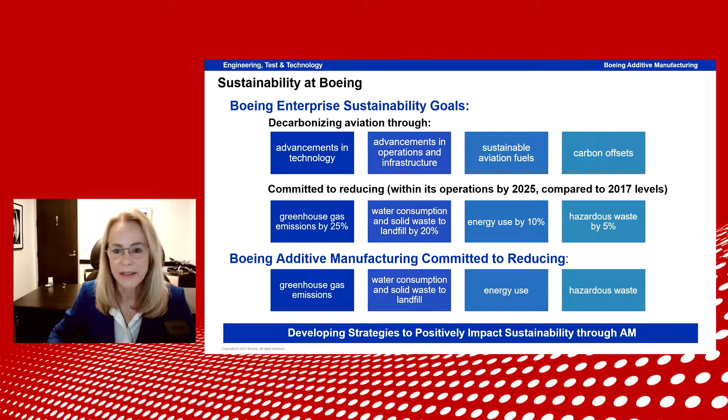One is because of the intrinsic nature of additive, where we use very close to only the material that we need. So if we're just doing a part-for-part swap where we haven't changed the design, we're using a lot less material. But then there's another way as well. We go a step further, and then we can optimize because of additive — we can optimize that part and lightweight it, and even use less material. So we have less waste generation and design optimization. I think we all know that we can lightweight parts.

And integrate assemblies, so we can reduce the actual operations of assembly by integrating parts together. And we eliminate not just the parts, but all of the processes that go with those parts — the procurement of fasteners, the testing of the other parts, the transport of all those parts. We reduce that, and all the energy consumption that is coupled with that. We eliminate primary tooling, and that's the labor, the time, the cost, and the materials and energy.

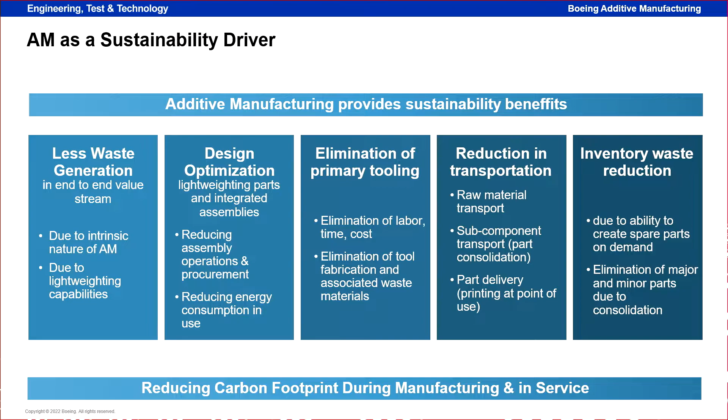Reduction in transportation, that's the raw material transport at the early stage of the value stream—the mining of the material, the converting of that material to a printable material, and the transport of that material—that's greatly reduced. And then all the other reduction in transportation, the subcomponents that we've eliminated.

So when people ask me how many parts are you printing, Melissa, I say you got to flip the question into how many we're eliminating. And when we eliminate all those parts, we eliminate all of the processes, not just the overhead—I should say the energy overhead, with respect to quality, procurement, testing, transportation, and let alone the energy in creating those parts and materials.

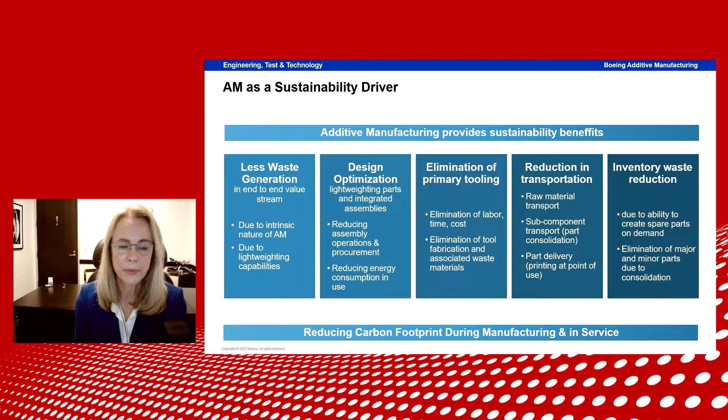And then the last part, inventory waste reduction. Due to the ability to create spare parts on demand, we're not inventorying large amounts, and as I said before, the elimination of major and minor parts due to consolidation—those parts don't exist anymore, so we're not inventorying them.

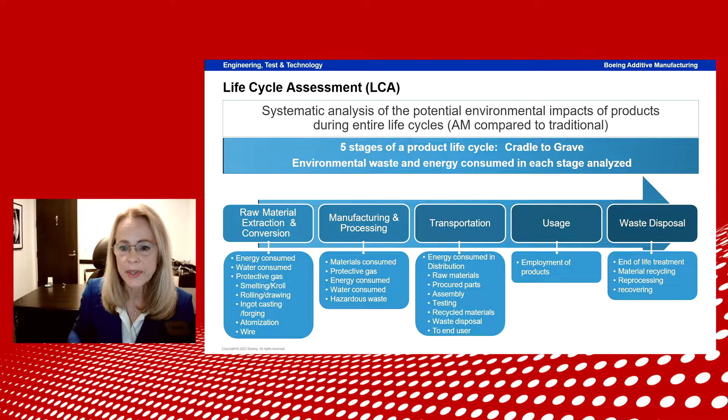The usage and the waste disposal—end of life, material recycling, reprocessing, and recovering. So these are the attributes that we looked at for our case study.

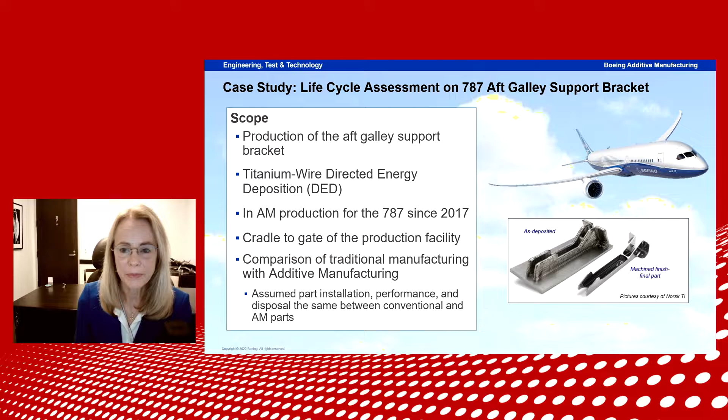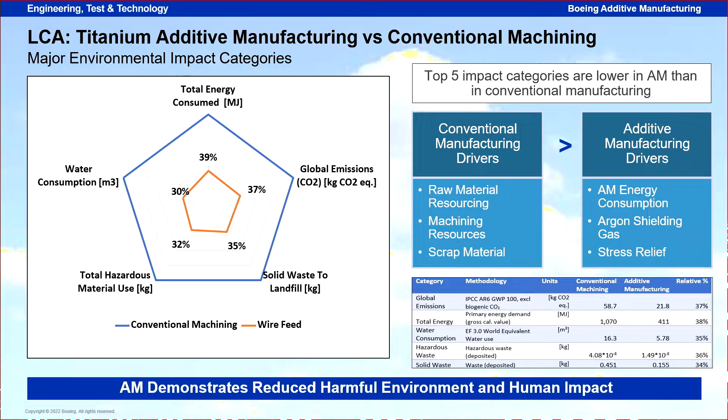And this is what we find. Excuse me—so we have, there we go, the titanium additive manufacturing versus conventional. So we have the five key metrics that we've aligned to our Boeing goals: energy consumed, global emissions, solid waste to landfill, hazardous material use, and water consumption. And the blue in that pentagon shape is the traditional case.

The orange is what we measure in our additively manufactured case. So you can see in every single attribute, we're significantly lower. So we've really reduced the harmful environment and human impact. And on the right-hand side is me trying to tell you why.

It's really for this particular part, the raw material resourcing was the major driver, and then the machining resources and that scrap. And even though the additive manufacturing process has pretty high energy consumption, and we had to use argon gas shielding, and we had to stress relieve things we didn't have to do otherwise, that was still accumulatively much less than the conventional manufacturing drivers.

I'll interject here that this won't be the case for every modality, every part. The particular case that we've decided to study first has this really great attribute.

And one of the things that we're doing now at Boeing, we're doing a case study for powder bed fusion and a manifold that's typically cast, and then another powder bed fusion for like a sheet—what's typically a sheet metal bracket. And giving away the punchline in advance, we'll find that the sheet metal bracket is going to have a really bad sustainability impact, and it's best to just produce that part traditionally, which was just something that we really wanted to know.

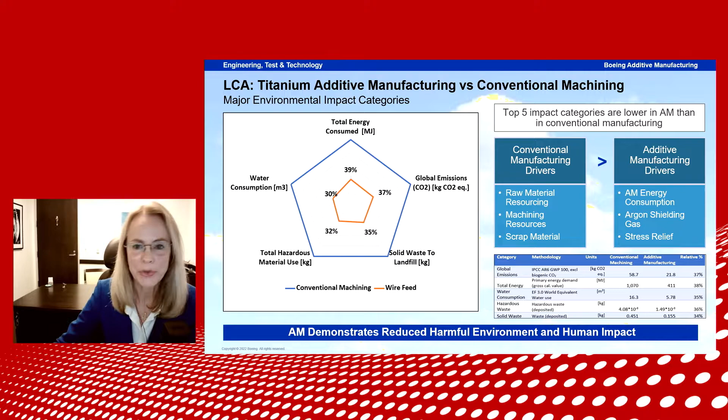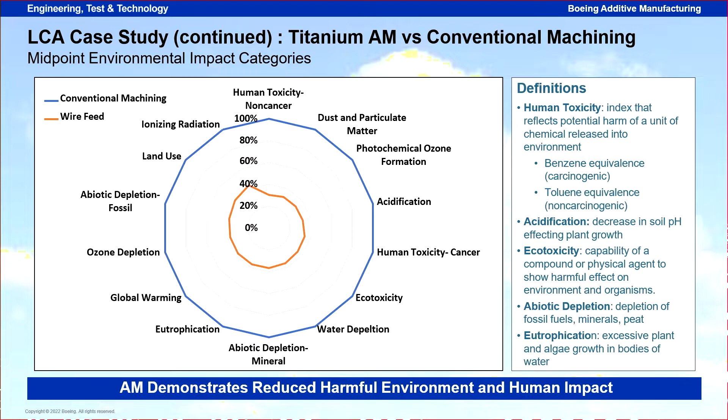Going back to the presentation, we looked at other drivers. Some call them secondary, but I think they're really important too: human toxicity, both carcinogenic and non-carcinogenic, acidification, ecotoxicity, abiotic depletion, and eutrophication. I have definitions on the side if you're not familiar with these. You can see the additively manufactured part is always significantly lower, so it's really reducing the harmful impact on the environment and to humans.

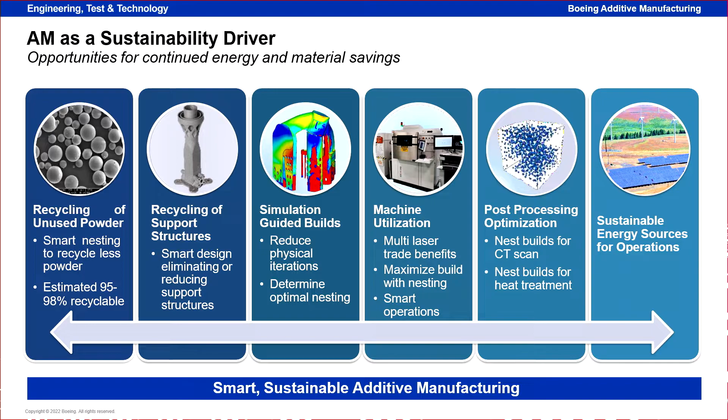There are a few other things we can continue to do: being mindful of how we recycle our powder, being smart in how we nest things. The little part I'm showing in the second column is an AMOS command horn antenna launched on a satellite in 2019. It's a redesign from a traditional part which had many fasteners. It was designed as a monolithic part, and I really like this part because it was designed not needing a single support structure. We've got to get smarter with respect to support structures and designing for no support structures. I think many times that's possible.

Also, simulation-guided builds make sure we get it right the first time—this is part of our value stream. Machine utilization, we're doing some studies. It looks like multi-laser machines use a lot of energy but go faster, so many times it's beneficial to use those. We'll actually use less energy holistically. Post-processing optimization and nesting, CT scans and heat treatment, and finally sustainable energy sources for operations. So this and other things, we're always looking at how we can be even better.

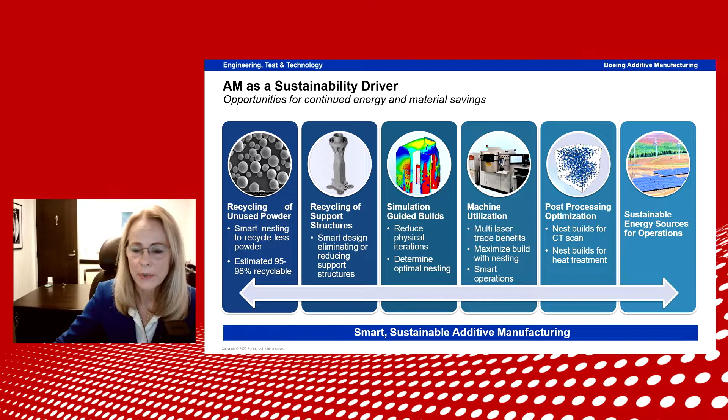I'd like to close with a quote. I think it's really important. I like this one: 'A society grows great when old men and women plant trees in whose shade they know they shall never sit.' I think this is really important because it points out that we don't do this right now for ourselves—we do this for future generations, to make sure their world is a better place. So I will end there.

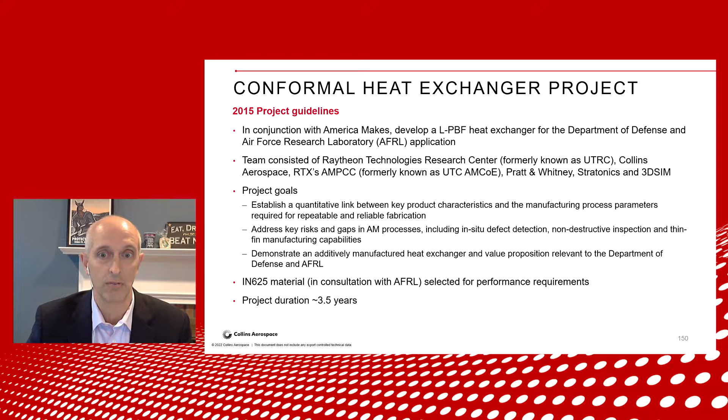We were working with Inconel 625, which is certainly a material all of us know quite well, especially in the aerospace industry. This project duration was quite long, about 3.5 years. The project got started in 2015, but we ultimately didn't deliver the final heat exchanger until sometime in 2019. That speaks a little to the persistence, and we'll talk about lessons learned later, but the persistence and focus of operating in an environment like this across a long time.

For the conformal heat exchanger, we took what we thought was a pretty novel approach. At the time, if you remember back to where we all were in our additive journeys back in 2015, some of what we might look at today as pretty normal or standard was fairly cutting edge or groundbreaking. So using some of the predictive tools, not only for process but also for performance of the part, I think at the time was fairly innovative.

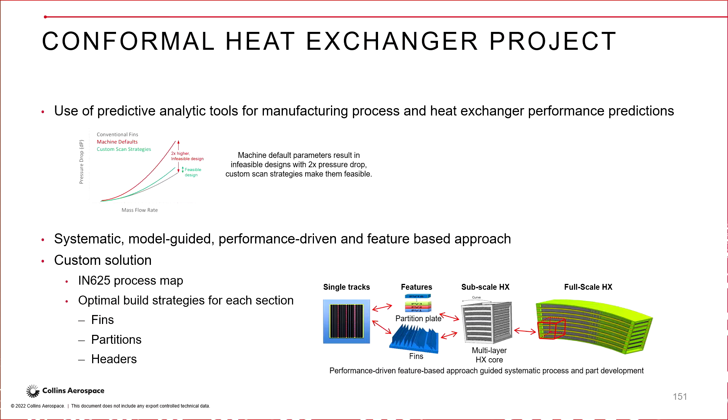What you can see from the graph is really about the machine default parameters. At the time, when some of the machines didn't have the capabilities that the wonderful OEMs are producing today, we really needed to look at customized parameters - how we could work with the machines and all the parameter sets in order to design and produce parts that got down to some of the features we needed. Heat exchangers and their performance depend heavily on surface roughness, a huge aspect of all the subcomponents - the fins, the plates, et cetera. So working with customized parameters was very important to us.

We took a physics-based model approach. We wanted to look at the performance of not only the final assembly, but the individual components. That was very important to us. From there, we developed a customized solution for each section of the heat exchanger. How we attacked the fins was different than how we attacked the partitions, which was different than how we attacked the headers, because each of those parts have different performance characteristics. Each section has different requirements, so a one-size-fits-all approach was not going to optimize the performance of the part.

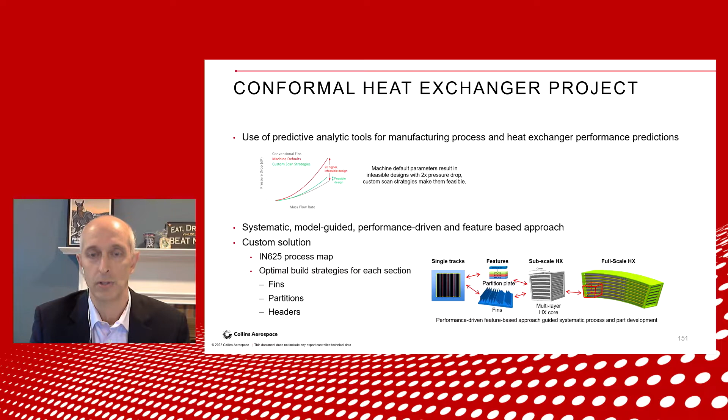So a key learning here was: customize your build, customize your strategies for each section of the part, whether you're building a heat exchanger, a housing, landing gear, whatever you may be building. Look at each individual section and really attack them individually.

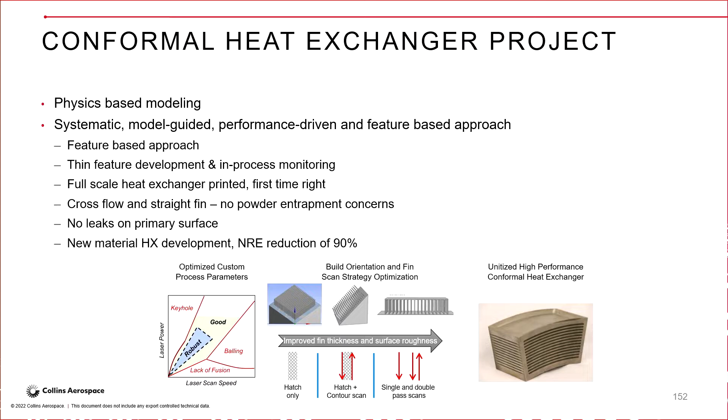I mentioned the physics-based modeling a few moments ago, and we took a look at different approaches for the different components, but also how we looked at the machine-material combination. Building a customized process map, which you can see on the left side, we were able to work with the machines and find our sweet spot, where the combination of laser speed and laser power gave us the best output, the best outcomes inside the build chamber.

With respect to the heat exchanger itself, as has been mentioned a number of times today, we wanted to get it right the first time. Although additive at the time was still fairly new for us, and we were learning, in everything that we did, we wanted to succeed. We'll talk more about success on a subsequent slide, but success doesn't always have to mean hitting your objectives. If you're learning and bettering yourself and your process, even from a quote-unquote opportunity, aka maybe a failure, there's nothing wrong with that. So while we wanted to get everything right the first time, we did not do that - I'll be very honest about that. But as long as we're able to learn and continue to move ourselves forward along our journey, that has to be defined as success, and I'll talk more about that on a subsequent slide.

Some of the performance characteristics, obviously, we talk about no powder entrapment. For a difficult closed geometry like a heat exchanger, powder entrapment is a huge issue, so that was important for us. Leaks on the primary surfaces, obviously we cannot have the fluids interacting, and so that was important.

And then, obviously, looking at some new materials, trying to reduce our NRE. So really trying to, through modeling, through simulation, reduce a lot of our efforts up front. Very, very important metric for us, and we were able to do most of that.

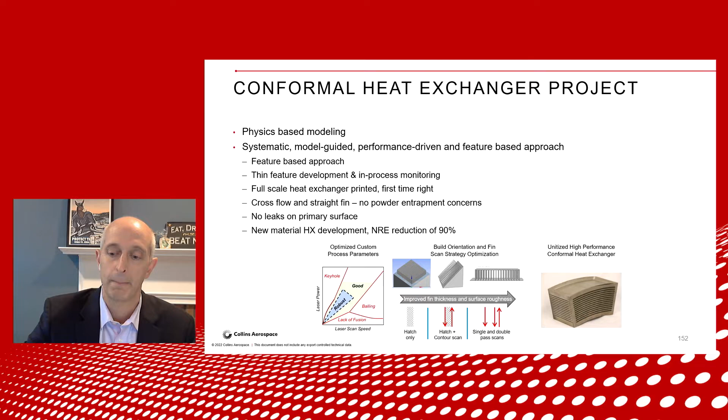So how did the team work? Again, we all understand the physics of additive manufacturing. I'm sure everyone in the room has great experience in that. But for us, one of the key learnings was, how did we break this down? What were the opportunities from an organizational perspective to really improve?

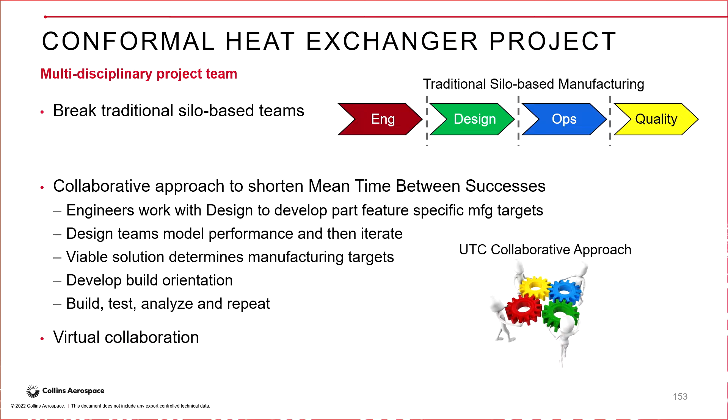If you think about our traditional silo-based manufacturing, engineering hands off to design, hands off to operations, hands off to quality, et cetera, and it goes through the value stream in a very linear fashion. But for us, we knew we needed to break that paradigm. We knew we needed to change the way we did business.

And so we really took a more collaborative approach. The graphic down below shows really all of the different functions, all of the different teams were interacting with each other on a real-time basis. And we kind of got rid of that linear nature of our previous operations.

One of the things we were able to do is what I've sort of coined the phrase mean time between success. We talk about mean time between failure typically, but success can be defined however we want to define it. We defined it as long as we're continuing to learn, even if we don't hit our objectives, as long as we're continuing to mature our processes and better ourselves in the spirit of continuous improvement, that's a success. So reducing that mean time between success, reducing the time between iterations, was very important to us.

And so that last bullet of build, test, analyze, and repeat, we were able to shrink that time significantly from where we started when we first kicked off this project to where we ended. Going through builds much quicker, going through design analysis much quicker, going through simulations much quicker, very, very important.

And then virtual collaboration in today's environment, as I'm sitting thousands of miles away from all of you in Munich, the virtual world has unlocked, obviously, as a result of the pandemic, more than it ever had been previously. But at this time, in the 2015, 2016 timeframe, that was a new approach for us.

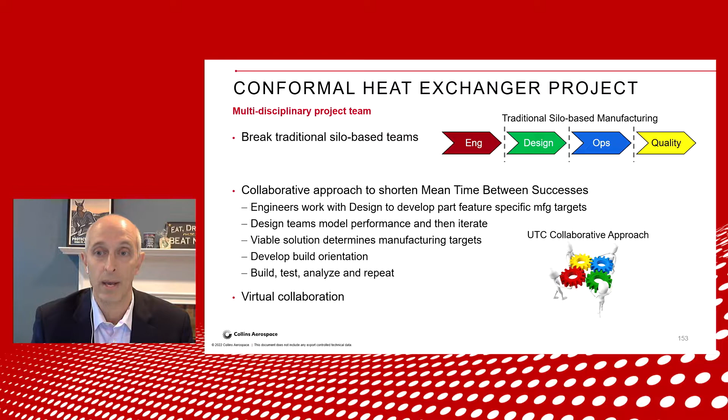So I kind of think that through this effort, we were maybe a little bit better prepared for the world in which COVID has presented us than perhaps we would have been. And so we learned a lot about how to work in a more collaborative way through these virtual aspects.

Thanks to our partners at Metal AM for preparing and publishing this article for us. And it looks like I may be missing a slide talking about some of our lessons learned. I do apologize. Let me touch on a couple of things, however. So a couple of things I wanted to touch on with respect to lessons learned.

Again, talking about breaking the way the teams work, talking about working more collaboratively, especially in a virtual environment, a huge success for us, a huge lesson learned for us. And it gets us through some of the early technology challenges much quicker. So again, as we like to talk about, mean time between success, not mean time between failure. As I've challenged my team, especially for a new technology like additive, success is however we want to define it.

And we're choosing to define success as no matter what the outcome is, right? If we're bettering ourselves, if we're learning from those quote unquote opportunities or failures, that to me is success. So when we define a set of objective criteria for a certain step, a certain build, et cetera, even if we come up a little bit short, as long as we're able to take those lessons and apply them and move forward in our process, move forward towards our objectives, again, we define that as success.

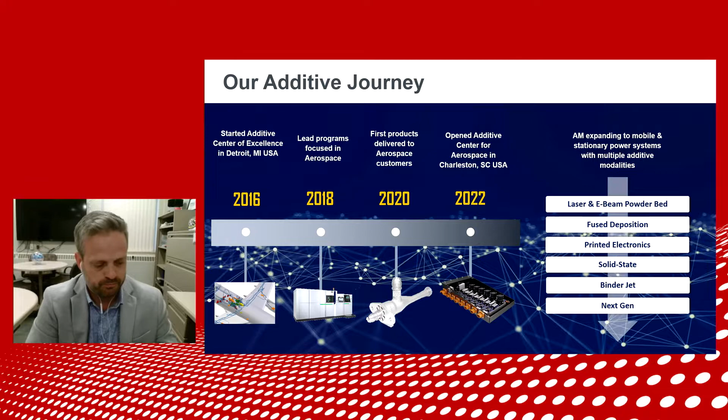And our approach has always been not centralized, but distributed to our businesses. We have about 50 businesses, depending on how you count. We're somewhere between 40 and 50 businesses globally. And we always have strong connection between what we call our Eaton Research Labs, which are dealing with low technology and manufacturing maturity technologies, which is where additive was for us 6 years ago.

And we are always co-locating people from our businesses with our research labs as early as the beginning of the development that we're doing. And then you'll see research folks on my team around the world where we deploy product into the field. So we always have a strong handshake between our businesses and research labs, moving from R&D all the way to full rate production.

And as we move to full rate production, a lot of that funding then stays with our businesses. But again, the people that we have matured in our research labs tend to go to our businesses and continue to drive the exponential growth that we're especially seeing in our aerospace business.

Just to give you kind of a high level view of how we look at additive, and especially from the research perspective, we really have 4 things that we work on at a high level to bring in new additive technology and validate it to the point that we feel proud and secure in putting a system into one of our plants. Obviously, process mapping is very generic, and you've heard about it, I'm sure, before. But we really look at how do we map out the entire variable space of a new machine.

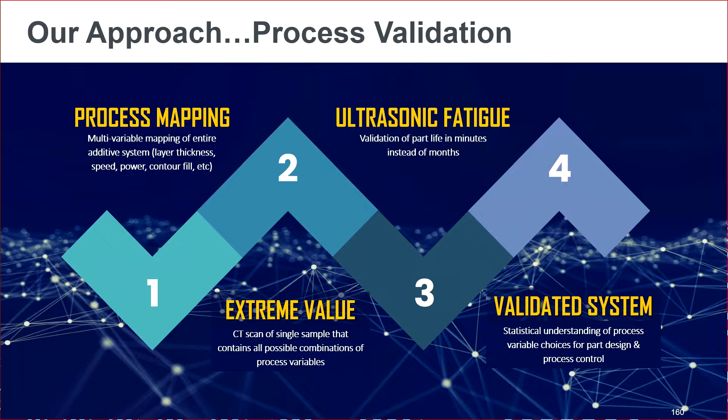And the approach we take is to look at extreme value statistics, where we understand the defect populations at all the different process parameters. And we can do that very rapidly using CT scanning technology. So we can map a whole, say, a new EOS or SLM system, or even a polymer system, in a matter of just hours, by creating towers that have every combination of process parameters that you could think of in a new machine.

And then ultimately that extends to ultrasonic fatigue, which is a key part of what we do at Eaton, which is we can validate the fatigue properties, the durability properties of a machine in minutes versus months, and show real data that represents the process choices we may make in designing a part, as well as understanding the statistical variation in the machine, and either getting it out or being able to work around it from a design perspective. And that allows us then to validate a system and deliver it to our production facilities around the world and feel very confident.

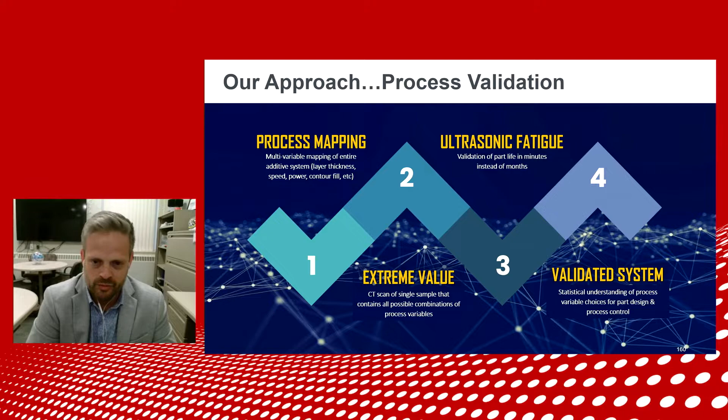And again, we can do that in a matter of days or weeks, versus using conventional methods, it would take you months to years to do that. So it's a very key part of how we can quickly bring in new additive technologies, as well as the design rules for that additive technology, and start making a product and making money with new additive technologies as they mature very rapidly.

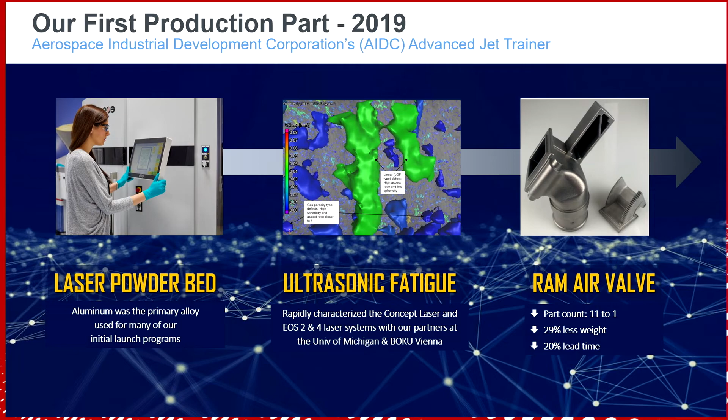So to give you just an example of the first part that we've publicly talked about, which is a launch of a ram air valve with AIDC, which makes the Advanced Jet Trainer Fighter for Taiwan. And this was a part that had 11 aluminum and steel parts associated with it in its conventional form. And we reduced that to one with additive.

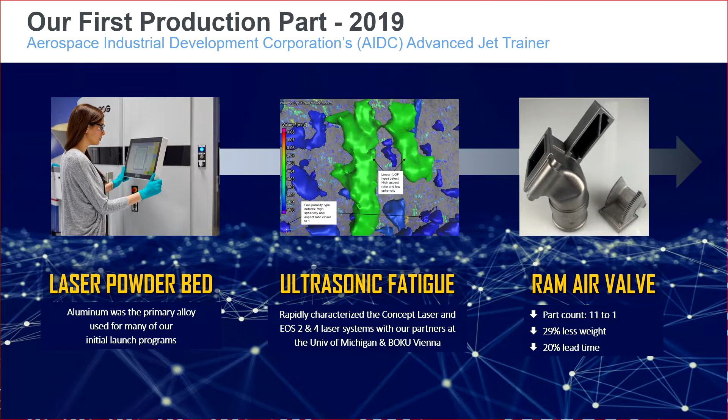So I know Melissa talked about part consolidation as a big driver for sustainability. For us, it's a big driver for showing that additive, even if it may be a slower process than conventional processing, and the powder may be more expensive, when you start to consolidate parts, you start to show real value at the system level. And that's where we find a lot of the value that we're driving and winning business with today. So in this case, aluminum and laser powder bed was the material and process that we used.

And as I mentioned before, ultrasonic fatigue and validating not only the process parameters of the machine, but ultimately the life and durability of the product was done using non-conventional fatigue testing with our partners at the University of Michigan and Herwig Mayer, who's a world-renowned expert in fatigue and a friend of mine out of BOKU in Vienna, Austria. And so we're very proud and have published many papers on this.

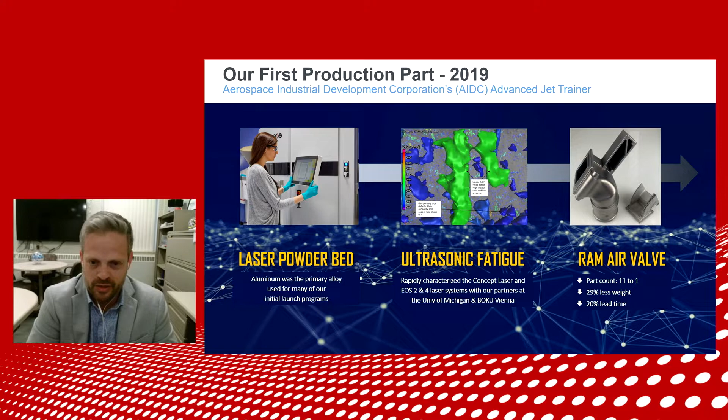And it's been a very strong differentiator for us to achieve in just a few years what it took many companies nearly a decade to do, to drive their first products into market and to start to kind of ride that exponential of growth, especially in our aerospace business.

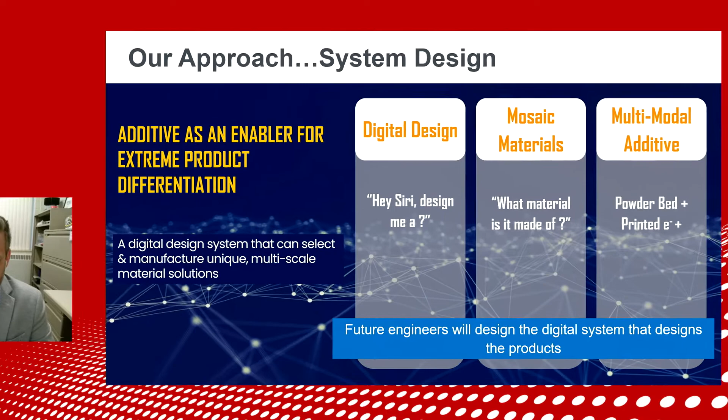So that leads me to maybe a more provocative piece of what I talk about all the time to our senior leaders. I work for the CTO and I'm often talking to our CEO and board on where is additive, but not just on its own as maybe a process that replaces casting, forging, and machining, but where does it fit in this kind of new digital age of system engineering design?

And so for me, additive is the manufacturing process that builds on what we call digital design, and I call mosaic materials, that when you add that with multi-modalities of additive, you can truly create extraordinary product differentiation. And as you think about that as a company, it leads you to that first pillar of digital design.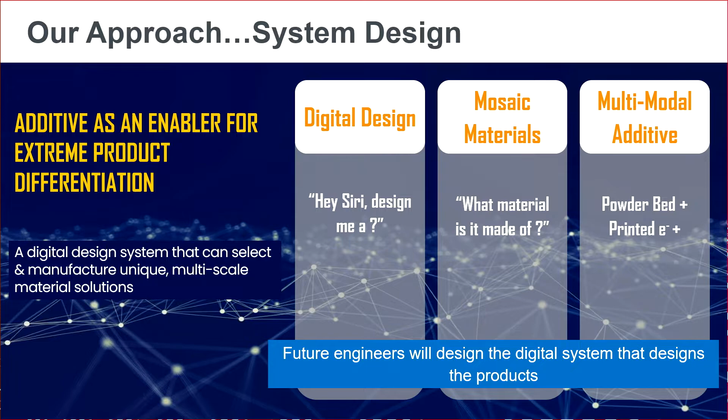And we've done a lot of work with the U.S. military in the last few years around this idea of, hey, Siri, design me whatever it is you want. In a world where you're talking to your phone or to Google, if you will, to a simple UI, and the computer is designing the system for you in minutes versus months or years. And it's doing it by looking at materials very differently as well.

We often talk about computational materials engineering. I look at it differently. I look at it in a world where in 20, 30 years, when someone asks you what material is your product made out of, you won't know what to say because we're not making things out of steel or aluminum or even conventional composites. The computer is going to create a mosaic of materials, not just one or two, but whatever, even at the voxel level, if you will, that's going to define the optimal outcome at the macro level.

And so having a digital computational system where you can talk to the machine and have it design multi-scale with additive as the approach, or multiple additive modalities as the approach to create value, is really where the future is going.

And so what we're doing at Eaton, and I'd love to talk more about it in the years to come, a lot of it's very sensitive right now, but we're designing power systems, be it solid state power electronic devices or other larger systems made from them, by combining additive with a lot of different material choices and letting the computer decide on how to lay it out to give us the optimal outcomes, be it noise, vibration, and harshness, EMI, EMC, or other aspects of, say, a power electronic system.

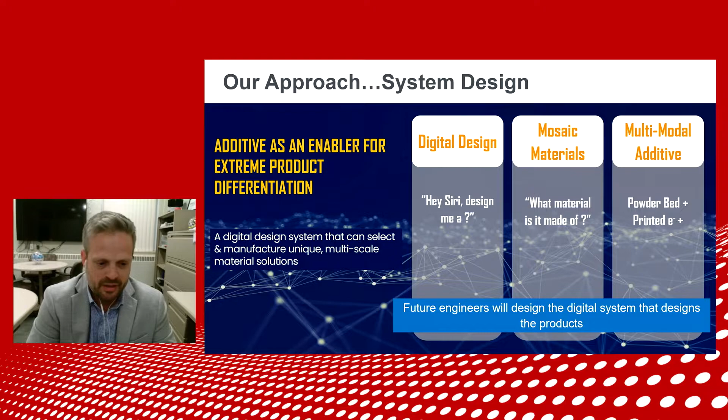And so with that, where are we headed? As I just mentioned, we started with taking a simple assembly and converting it to additive, taking the content out and driving value in materials that are pretty well known, like aluminum, Inconel, steels. And now we're actually using a digital platform to design the next generation of system products. So it could be a compact electric drive for an automotive or truck application. It could be, with that, an axial flux motor, a gear train, an inverter.

We're using this design approach of digital design via user interface, mosaic of materials, and ultimately, different additive modalities to drive incredible differentiation in mobile power systems. And now we're turning our focus to stationary power systems. Could be a large energy DC-DC power system for charging your car. It could be a very large megawatt transformer.

We're really starting to drive this approach and investment and bringing additive more than just a replacement for conventional processing, but an enabler for extreme product design and differentiation. And that's ultimately where Eaton is positioned and headed very rapidly globally across all of our businesses.